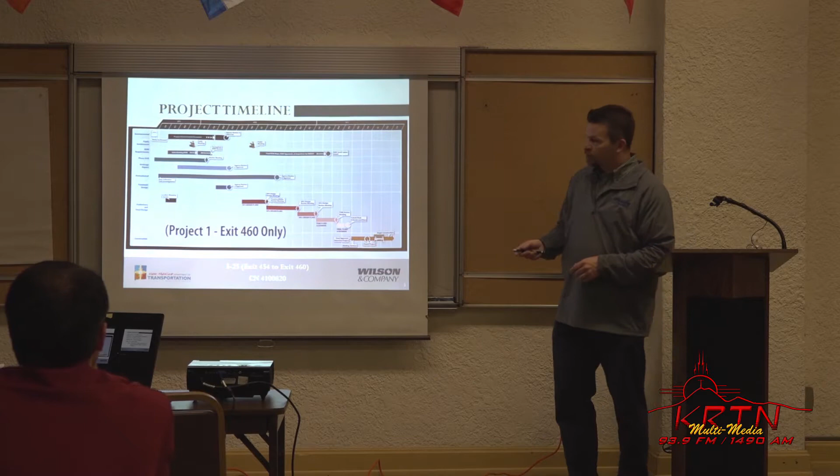So this is the I-25 Raton construction project, and we've gone over it a couple times, so I killed a lot of the introduction slides. A lot of people want to know what's going on and what's the schedule. So the schedule currently, and I don't expect you to see this with your eyes, I can't even see it, but currently we've finished a lot of the project information up here. We are still working on right-of-way and some environmental clearance right in here, but this is our project design right now.

And we're at, I actually will explain it later, but we're splitting up the projects. And so this is the status of Project 1, which is called the Exit 460 project. Right now, so this is January, February. So right in here is where we're sitting on the design schedule. So what we've done is we just recently finished the 90% design submittal and review. And so now we are working ourselves into what is called the PS&E, Plan Specs and Estimate review, design submittal.

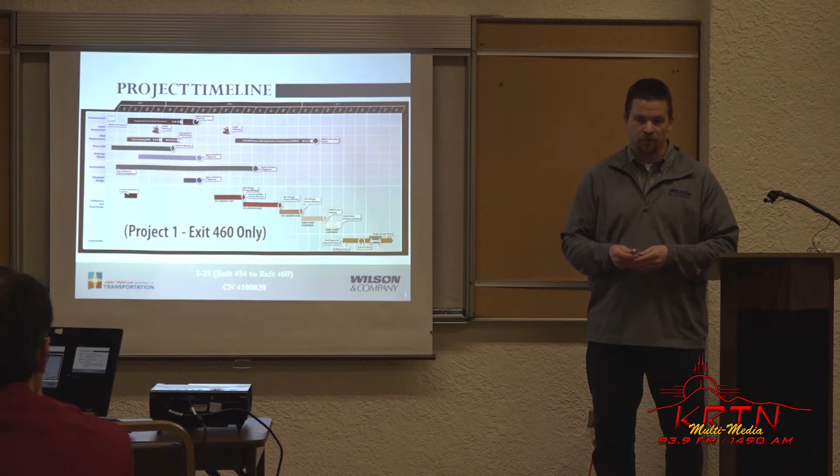That is the very last design review that we would be turning in to the New Mexico DOT for their review and comment. Once we finish that particular design review, we will address their comments and turn the final plans in to the New Mexico DOT for them to put out for bidding. And so bidding and letting would be scheduled roughly at the end of April. And then the DOT has a process.

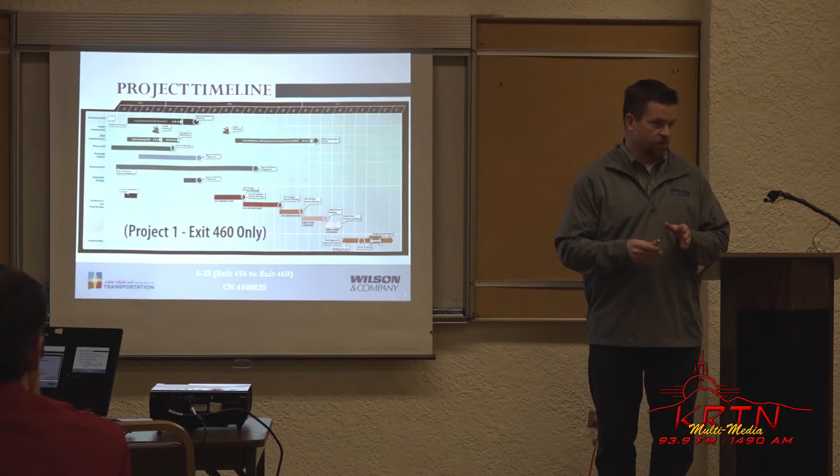They have to make sure it's ready to go out for bid, and then they have to advertise it, and it'll take a couple months to go through that process. And then when the bids come in, it takes about a month or so for a contract to get executed. So you're not looking for construction until late summer, early fall of this year for this project. And I'll explain what this project means.

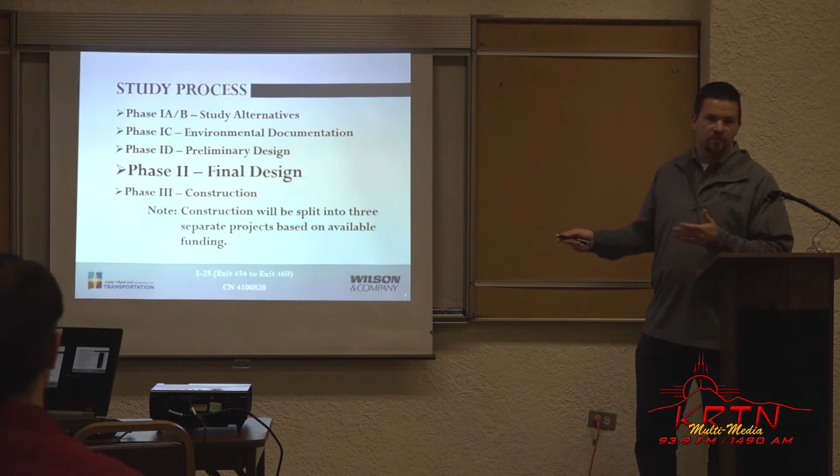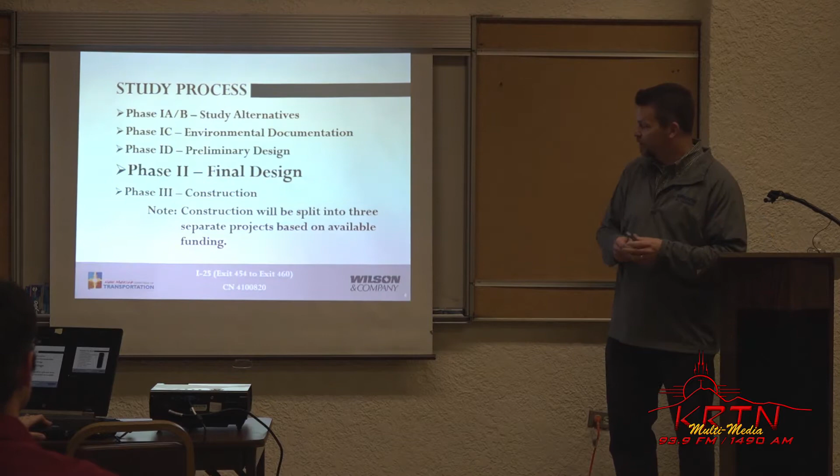As you can see, the next step would be construction, and we will be splitting the whole project into three separate projects. And Ms. Audra is going to explain them to you. Oh wait, you moved the slide, I'm sorry.

So purpose and need of the project, we want to fall back. The reason we're doing the projects, for those of you that are familiar with the corridor, there are rock slide areas throughout the entire corridor, roughly 10 locations that have rock slides. So we are trying to provide mitigation to prevent those rock slides from continuing to happen, make it safer for the driving public, and make it safer for the New Mexico DOT staff that have to go out there and maintain the roads.

There are also issues with some of the roadway embankments that we're looking at to verify if we have to do any stabilization. In some areas, there have been some historic failures on the road. Drainage improvements, there's a lot of drainage going underneath the road. We're going to make sure that those pipes are sized correctly and that they get replaced if they need to be. If they've gone beyond their useful life, if they're falling apart, we want to replace those and put in new structures.

The pavement is probably one of the biggest things out there. The pavement is continuing to fall apart over the years, so we will be doing not a full pavement reconstruction, but what is called a pavement rehabilitation. We're going to mill out several inches, upwards of 5 to sometimes 8 to 9 inches of pavement, and put new pavement in its place, so it would have a much better riding surface and last longer.

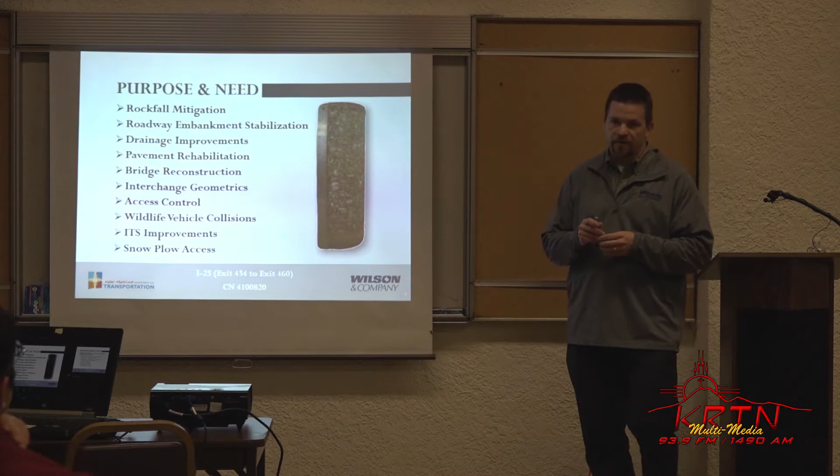And then we're going to do some ITS improvements to help people get awareness of the driving conditions in the area. And we've been looking at the snowplow access for the maintenance guys. So those are the main purpose and needs for the project. And I'm going to let Ms. Audra talk about the project splits.

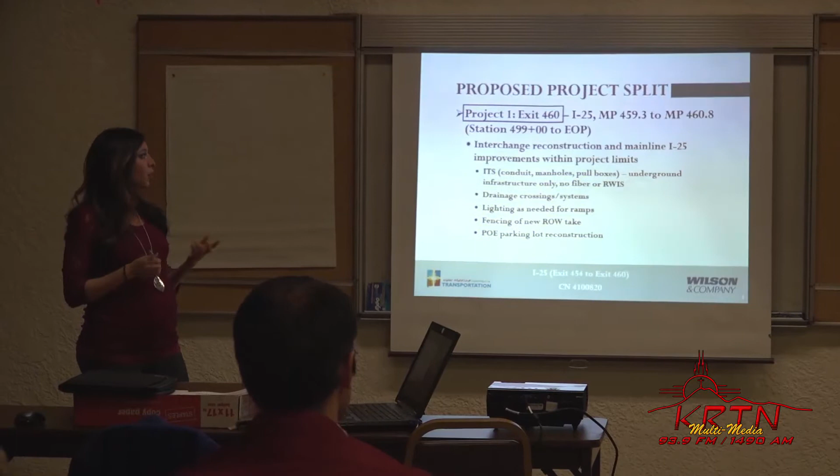So the first project is going to focus on exit 460. It'll consist of interchange reconstruction and mainline I-25 improvements within the project limits. This will also include ITS improvements, just the conduit, manholes and pull boxes. The fiber and RWIS won't be installed until project 2. The drainage crossings and culverts will also be included in project 1. Lighting at the exit 460 ramps and at the port of entry will also be constructed.

So project 2 will be exit 454 and the safety improvements. It'll have interchange ramp widening, so we'll add acceleration and deceleration lanes to the interchange. It'll also have rehabilitation of mainline I-25 within the project area. The bridge at exit 454 will also be rehabbed, and lighting at the ramps will be included. The drainage crossings at exit 454 and between exit 454 and exit 460 will be included as part of this project.

The ITS is when the fiber and the RWIS will be installed, and the rockfall mitigation along the entire I-25 corridor will be mitigated. Game fencing will be added throughout I-25, and there will also be a wildlife crossing at milepost 458.

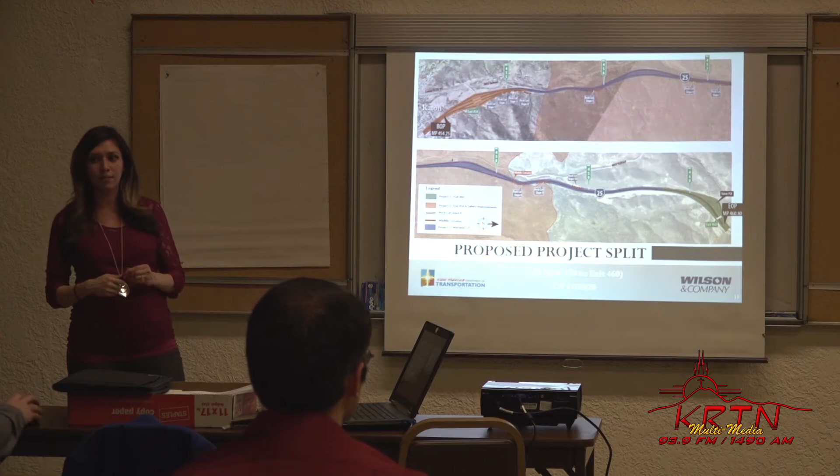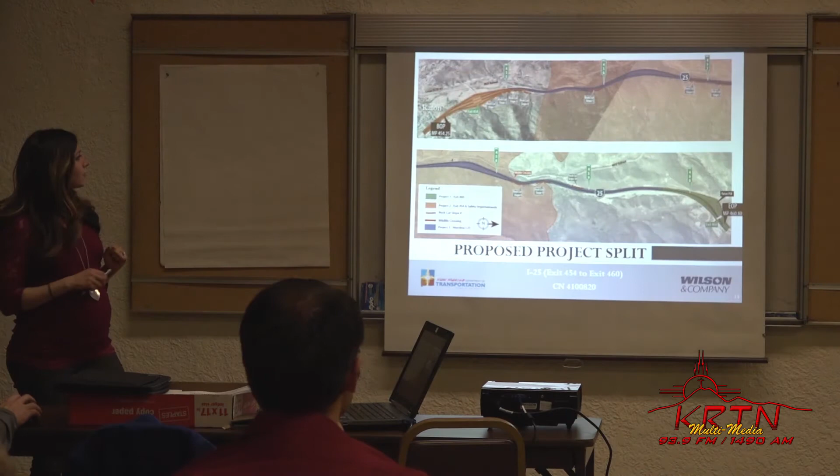And then the last project will just be mainline I-25. So we'll rehab I-25, and then also if there's any guardrail that needs to be replaced, it will also be done at that time on any concrete wall barrier. And the bluish is project 3.

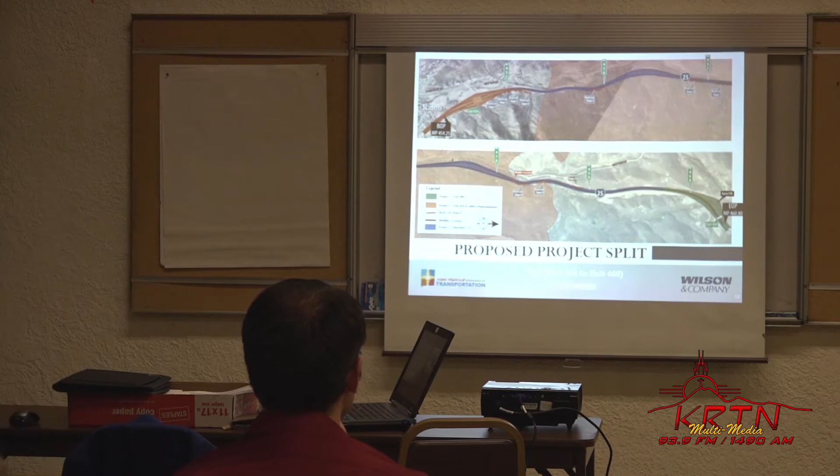So the timing, we talked about a little bit of the timing. Project 1 is the one that we're going to be finishing up, and that's the schedule I gave you. Projects 2 and 3 are going to fall in subsequent years. I'm not saying exactly subsequent years. It all depends on the funding that the district does receive. So don't necessarily think that they're going to fall one right after the other. Subsequent years of funding will be determining when those get built at this moment. So that's about as much as we know at this time.

This is exit 460 layouts. For those of you that hadn't been to previous meetings, this is the new interchange up at the Colorado state line. So this is what we're calling Project 1. For those of you who are familiar with it, the state line is right here off to the right of the picture. And this is the actual existing bridge that is out there today.

As part of this project, that bridge will end up being removed, and a new bridge will be built, I forgot how many, maybe 1,000 some feet south. And so it's actually going to be south of the Raton Pass Camp, and this is the port of entry right there. So in lieu of seeing it here, you're going to see a new bridge over here. The new interchange, of course, will be a normal diamond type interchange. We've explained that in the past.

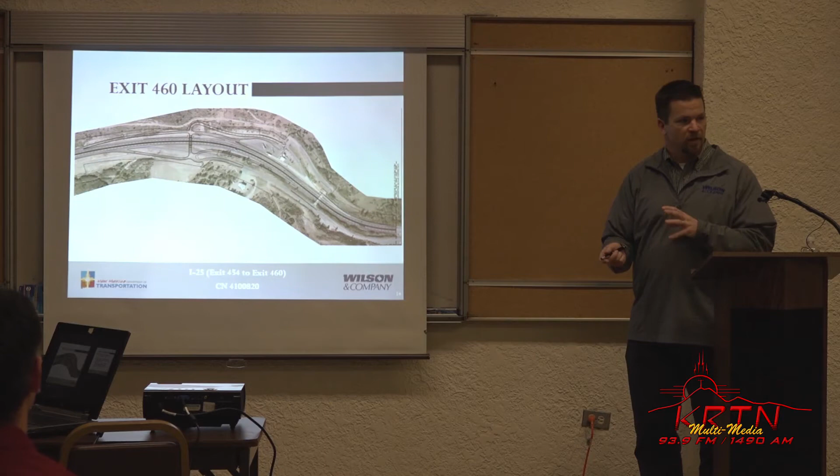We went through several alternatives to look at how we can make this a more simplified interchange that people understand going in and out of. And we are getting rid of what we consider a very unsafe condition with a one-way ramp turning into a two-way frontage road where people could actually go down the wrong way on the ramp and enter the interstate going the wrong way. So we're going to fix that. That basically gets fixed with this configuration up here.

So what you're seeing here is the old ramp right now in that spot, and this is the existing frontage road. The new ramp is going to take off in a similar location, but it's going to come out here and it's going to rise up higher. Just note that the reason we have to go up higher at a steeper grade is this bridge, of course, has to go 20-some feet over the top of the interstate. So this ramp is nice and flat, and it's not having to go over the interstate.

So when it gets built, this will be a much steeper ramp to get up to this point, and then you can either go left or right. If you go right, you can get on the frontage road, go to the Raton Pass Camp, or you can go left and go across. And this is going to be a new frontage road that'll get you over to the port of entry. For those that work there, that'll be their access in and out of the port of entry on a daily basis.

There will be a new entrance ramp right here that takes you onto northbound I-25 in lieu of the one that's out here off the sheet in Colorado. So they're confined, the ramps are next to each other, and so you can actually see how to get on and off. Sometimes it's a little confusing when the ramp is way down several thousand feet away.

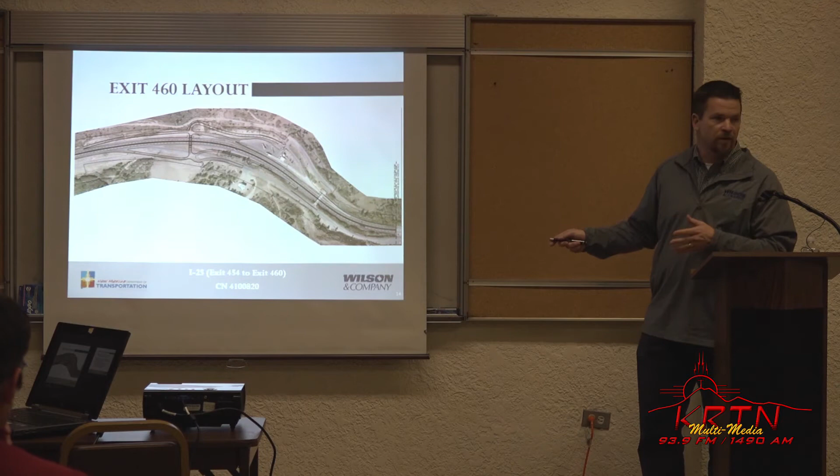We have a new exit that's just south of it, and to get off, you would actually peel off here and go up to that point. So you don't have to go through the port of entry now to actually get off at the exit anymore. It makes it a little more simplified for everybody that's not used to it.

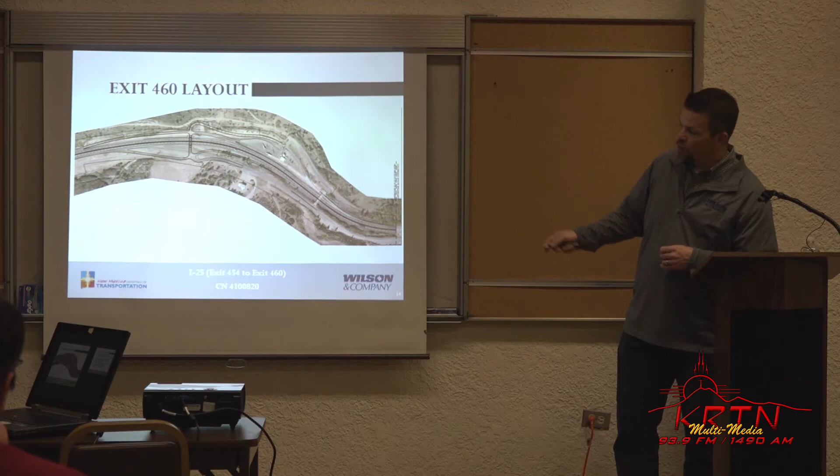The trucks that do go through the port of entry will go through as they normally do, and they will meet back up with people that are on this exit ramp. And everybody, being the trucks and vehicles, would actually come down on a new southbound entrance ramp right there. And that, again, will be a steeper ramp, of course, because of the grades for the bridge.

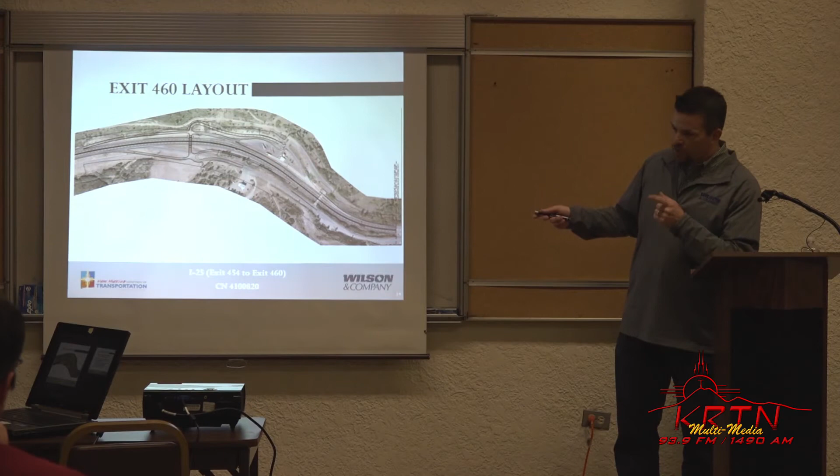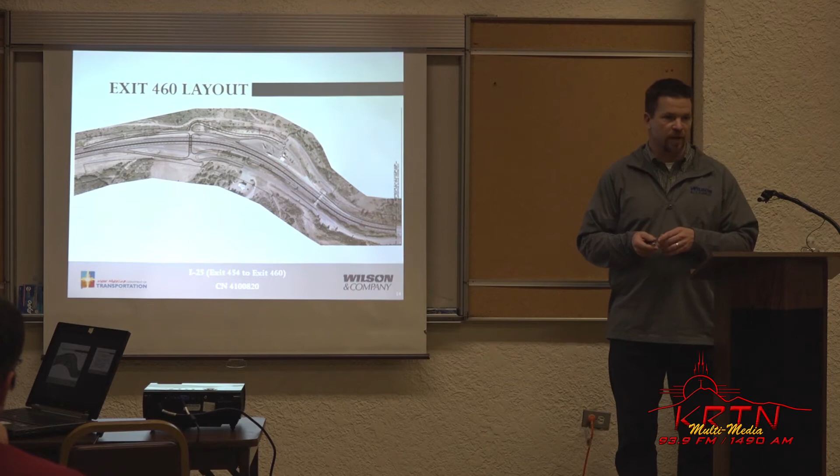Audra mentioned there's going to be a right-of-way take. We've mentioned that to Jeannie Myers, and we'll continue to coordinate with her, but this is about a 1 acre parcel of right-of-way that we need to purchase for that frontage road connection there. And I think that's it. Rockfall. I'm going to let Bob talk about geotechnical and rockfall and how he's going to fix it.

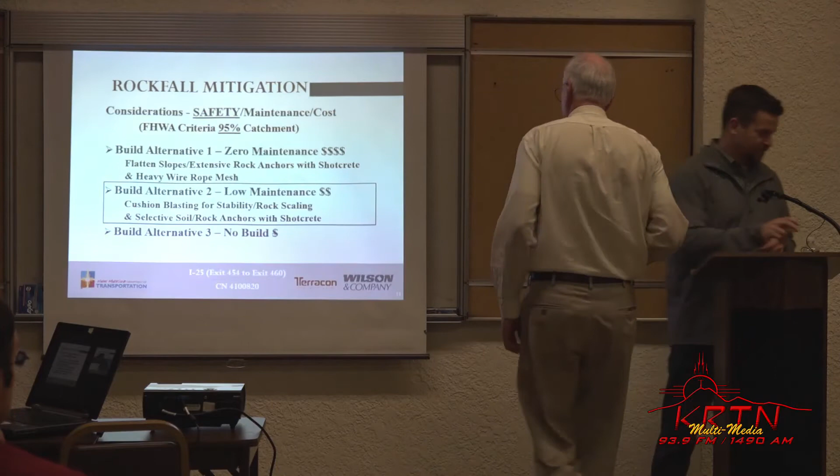So I appreciate the more informal and relaxed atmosphere of this public hearing versus what we see in Albuquerque. So thank you.

So Mike Anderson, the principal of the Terracon office in Albuquerque, presented some of this previously at our past public hearing. And I'm basically the geotechnical project manager for Terracon.

So we have focused in on a build alternative 2, which we call a low maintenance and address the safety issues of the rockfall mitigation. We had a build alternative 1, which was zero maintenance, lots of dollars. This concept was about a $7 million fix to take that approach, whereas the build alternative 2 is a little over a $2 million budget.

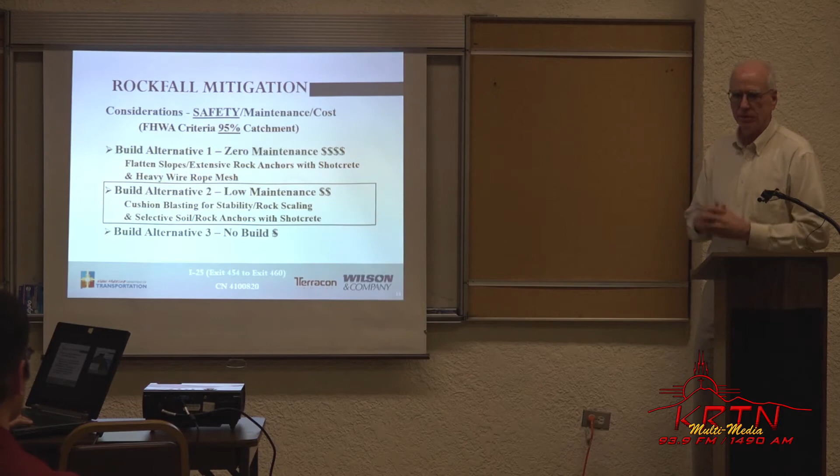And our approach is basically cushion blasting for stability, where we need to get into the existing slopes, either with massive sandstone or to lay back slopes. We'll be looking at cushion blasting, which protects the slope from future damage. There'll be a lot of rock scaling, and this is where you actually have, I call them rock monkeys. You get up on the slopes and you're actually pulling down the boulders and popping them out and putting in small charges just to get the loose rock down below where they can be removed.

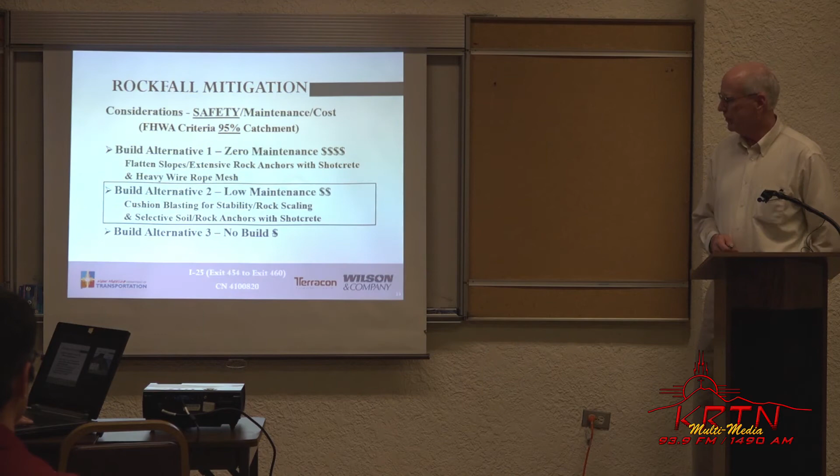And there will be some selective soil and rock anchors with shotcrete primarily where we need to protect for erosion, which will be in the shale beds. The build alternative 3 is not an option. We're going to take care of the problem. So this is the major rock cut, which is about a $1 million fix, and this is south of milepost 456, and it's about a 1,000-foot run.

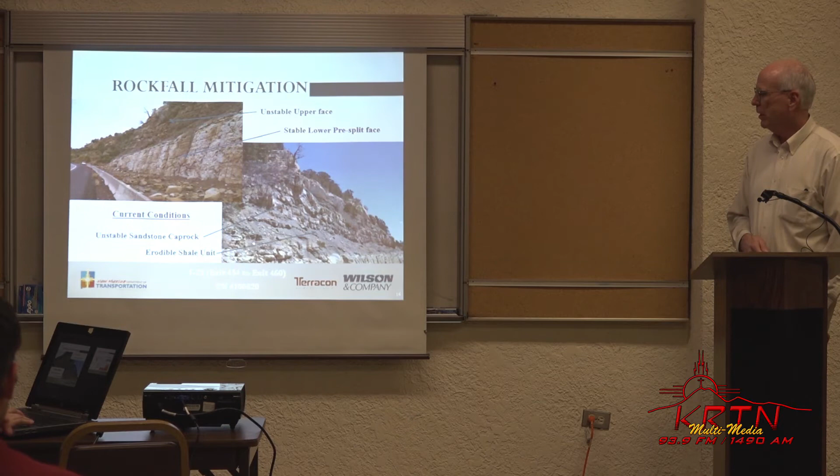And with the stability analysis, there's a program called the Colorado Rockfall Simulation Program, which actually models rockfall and determines where the rock will end up. And so the computer program throws a couple hundred rocks over this slope, and we can get a pretty good handle on how big of a rockfall catchment we need in order to capture that rock.

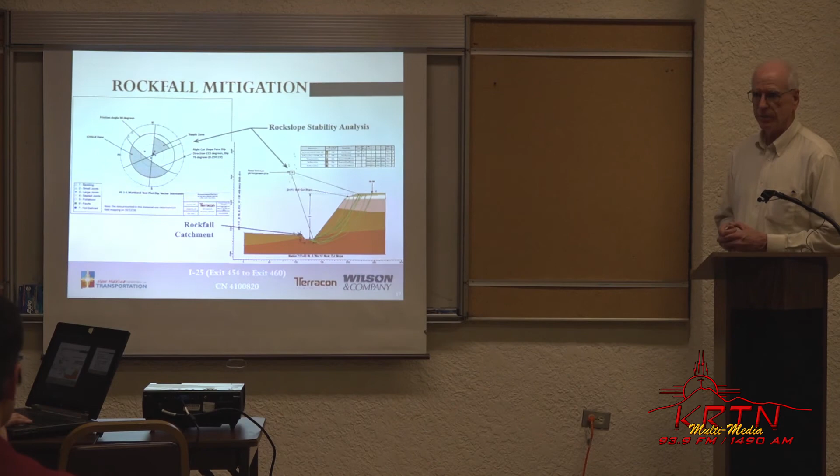On the previous slide, the goal is 95% catchment. Usually we can get 100% catchment. But at some locations, because of cost, the Federal Highway Administration allows 5% to get past, into the shoulder or even into the travel lanes. So simply because we do this engineering does not mean necessarily that you'll see no rock on the pavement ever.

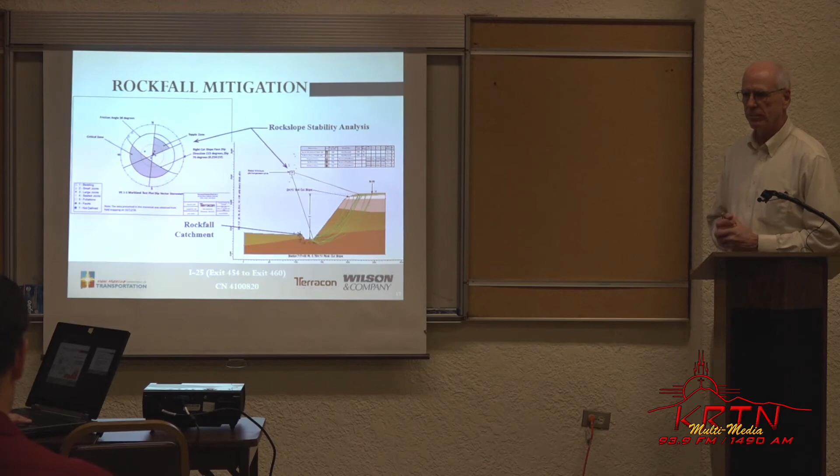So this is where we are, just in a very general way, at our 90% design. Where we have the massive sandstone, we're doing a pretty steep cut where we need to cut back into the rock. So this is a 1/4 horizontal to 1 vertical with that cushion blasting.

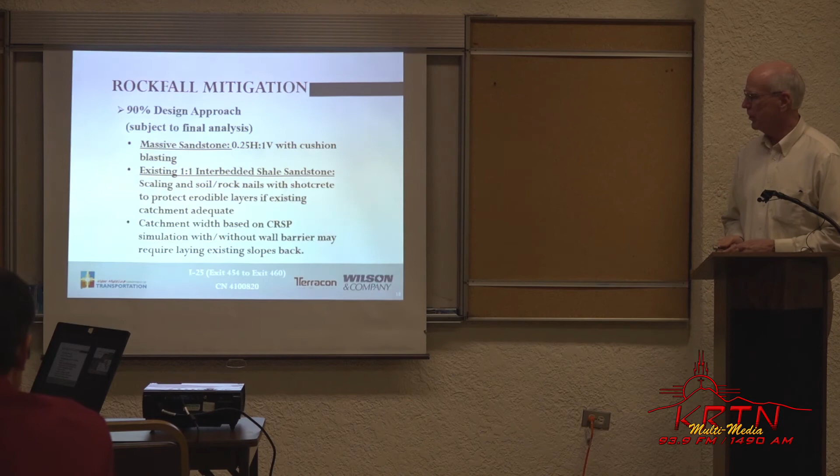Generally, throughout the project where we have existing 1-to-1 interbedded shale and sandstone, there'll be a lot of scaling. There will be soil and rock nails with shotcrete to protect those erodible layers. And this will be where the current catchment is adequate. Where the current catchment is not adequate through that rockfall simulation program, we will have to, again, blast and take the slope back into the existing slope to improve that catchment. So this is just a very general strategy that we're taking.

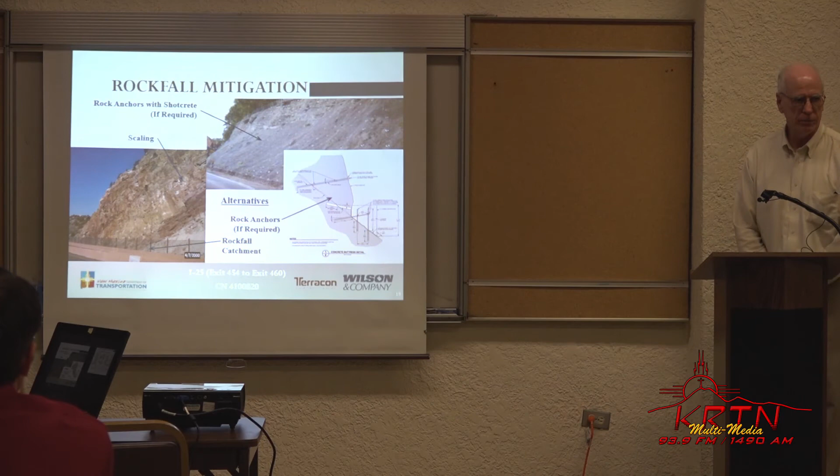And where required, we take care of the erosion issues through these anchors and more than likely shotcrete treatments to prevent the erosion of these shale beds that are degrading. So that's the general approach there.

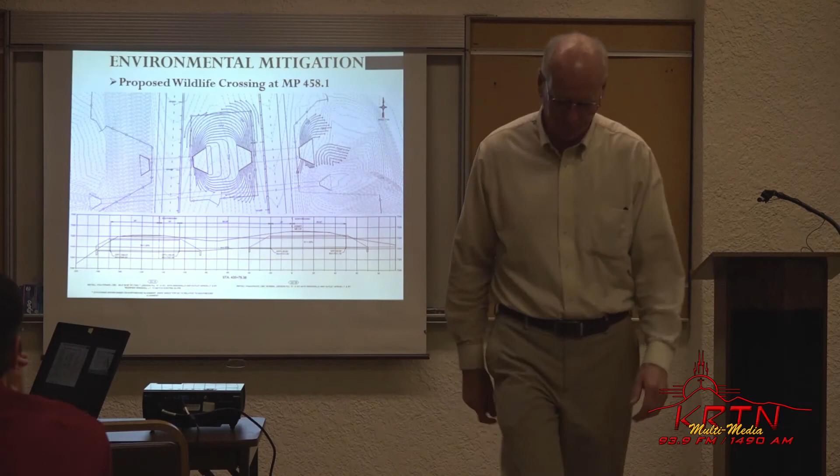Excellent. Thank you, Bob. You bet. I'll go ahead and explain the wildlife crossing, but I'll open up to Jim if you do want to say anything. I don't know if you do or not.

So I know in the back you're interested in the game and fish, you're interested in this one. So as part of the project, of course, there's a lot of vehicle collisions with bears and animals, deer, elk. So our biologist went out with his staff, and they did a study of the entire corridor to determine what kind of animal activity is out there, what kind of patterns they're doing. And he actually walked throughout the entire corridor to determine what would be suitable habitat and suitable areas for them to potentially cross under the road instead of crossing over the top of the road.

Because basically when Project 2 gets installed, you will have an 8-foot high fence along the entire state right-of-way there that will prevent them from getting into the area. So they're going to go to their normal spots where they probably walk, and they're going to walk along the fence probably, is what we hope they'll do. And when they walk along the fence, in time, they will probably learn that the fence will allow them to walk through this, what is called a concrete box culvert.

It's a big 14-foot wide by 10-foot high structure. It's not going to be for drainage. It's going to be strictly for the wildlife. In fact, you can see right here, this is actually the drainage crossing that's out there today. It's actually a lot lower, and the biologist was saying that the bears are actually crossing through this currently. So we set it up so they could still go through that one as well. But what you're going to see is this one is a lot shorter, and it's got an open hole in the middle. This is currently a spot where it's paved in the median, so it opens up.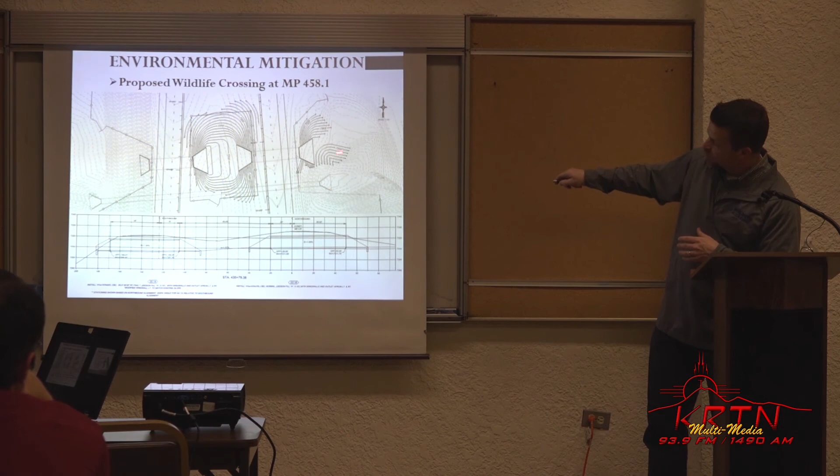You can see it's underneath the existing highway, and this is the existing ground up here. So we're basically digging a hole out in the middle of the interstate there, and we're going to put a fence around it so that they can't get up and out onto the thing. So this is the fence line coming in, going around, and going back out. So that's the fence that they're going to be walking along, and then they could come in and just walk straight through and go back and forth. It'll take time for them to get used to it probably, but eventually they'll see it.

What we don't want is all you hunters out there to be standing over here waiting for them. No. I told that to some of the guys at the office. They're like, oh, really? Where's that at? Where are you going to go? I'm like, guys, leave it alone. Leave it alone. But yeah, this will be a good spot for them to cross.

It'll prevent all the bear and vehicle collisions, because hitting a bear going 65 miles an hour is, I'm sure somebody's got it, immense damage to your vehicle. So hopefully that'll stop all the bear and deer and elk collisions. Did I miss anything, Jim? Yeah, you pretty much covered it.

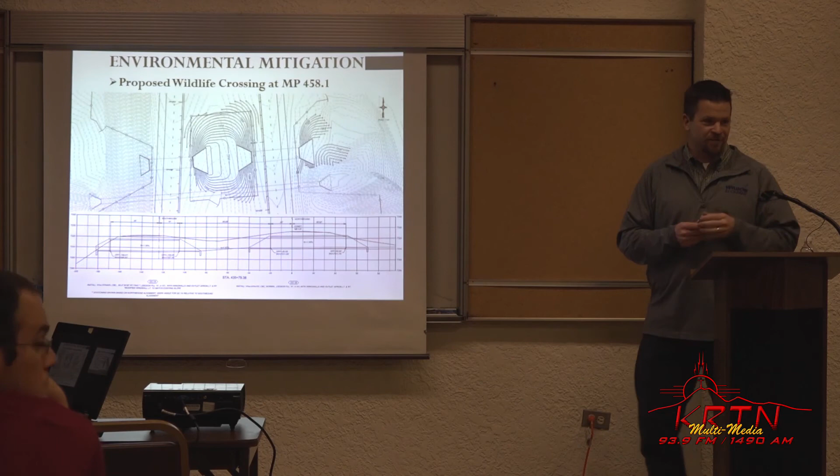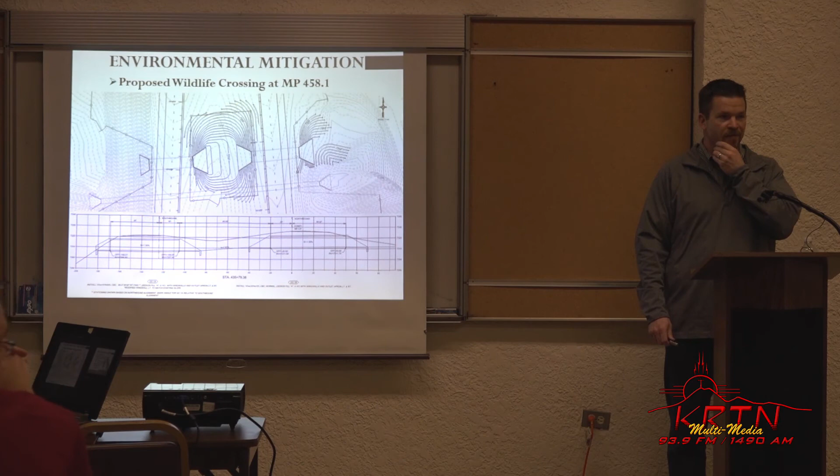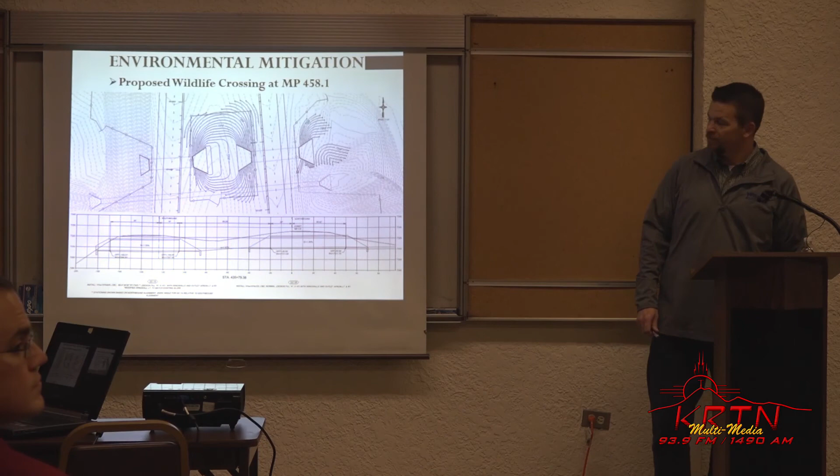The challenge with this project in terms of providing wildlife passage is that the slopes on the interstate, the drop-off slopes towards Raton Creek, are really steep. The depth of the bedrock, there's just very limited opportunities to provide wildlife passage. And even the size of these concrete wall barriers are actually really marginal for deer. Unlikely that an elk would use this, but bear and cougar and other small mammals would readily use this particular crossing.

But even though this project doesn't provide a large number of passages for wildlife, the plus side is you've got Raton Creek on one side that provides water for the deer, elk, and other wildlife, and then you've got Savage Creek on the other side of the highway and various stock ponds and stuff like that. So the resources are kind of distributed evenly between one side of the highway and the other.

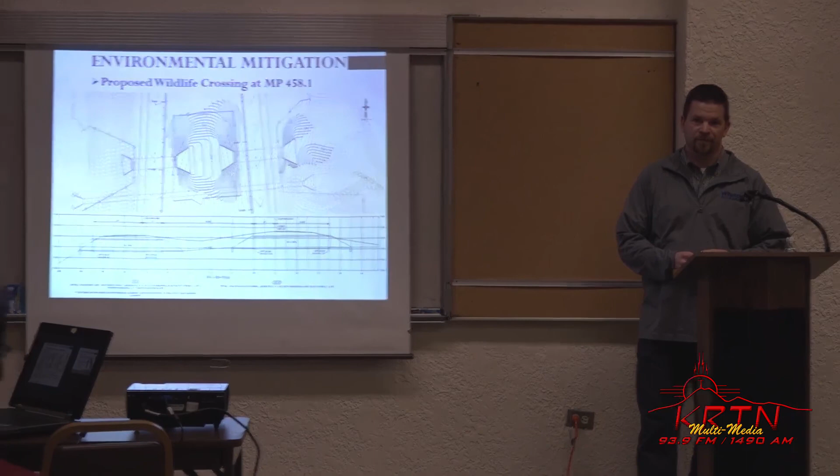And Glenn, did you? From a wildlife standpoint, we've worked with the DOT, and we picked out this location for this crossing. We would like to have more, but again, as Jim said, the way the highway is constructed the whole way, this is really the only viable place that we can even put a wildlife crossing in there.

My concern is I don't want wildlife to go up north and then try to cross and have a big stream of deer and elk and bears crossing at the top of the pass. That's going to be really the location where the fence ends. There's not another underpass until the Wootton exit, several miles at the bottom of that steep slope on the Colorado side. So again, it's not perfect. We're just trying to mitigate what's happening right now with the hundreds of wildlife collisions that are happening there every year. Thank you. Appreciate that input.

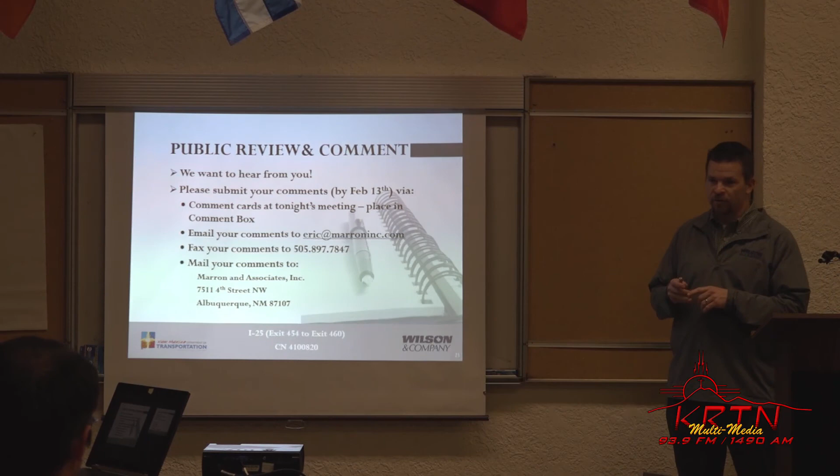So that is the end, and we finished before our deadline. That is the end of our presentation. Even though we've come to you a couple times and we've taken comments, we are always open to comments from the public. Several ways of doing it. We don't have a comment box, or do we? No. So there are comment forms on the table out here. If you want to write down your comment on the form, put your information on there. You can either hand it to myself or Audra. We'll take that back and give it to Eric, who keeps that.

You can email Eric right here if you want to write his email address down. He's the environmental consultant that works for us. He basically takes all public input and puts it in the environmental document. You can fax him there, or you can mail it to him. Once we finish this, we'll leave this up on the screen so anybody can write that information down. I believe this same information is on the comment form as well. Is there anything else? Okay, we can leave this up here for a little while. Chris's information is there, in case you want to get in touch with him, or my information for follow-up questions. If you just have a general question, you can send it to either one of us. And is that it?